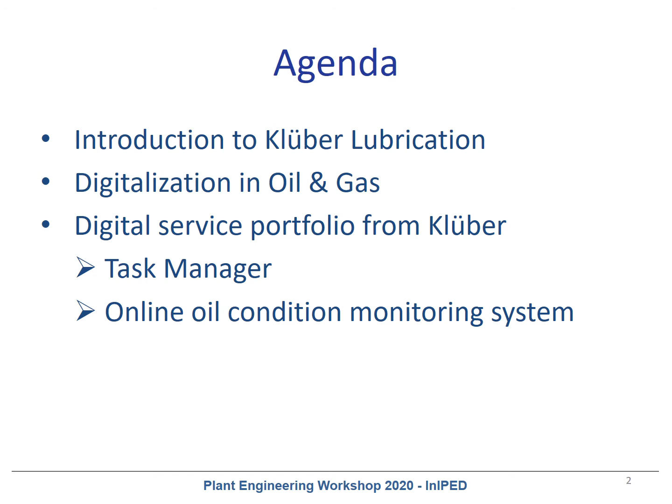I would like to start with a short introduction to Klüber before moving on to the topics of digitalization.

Founded in 1929 by Theodor Klüber, Klüber Lubrication is one of the world's leading manufacturers of specialty lubricants, offering high-end tribological solutions to virtually all industries and markets worldwide. Most products are developed and made to specific customer requirements. During its existence for over 80 years, Klüber Lubrication has provided high-quality lubricants, thorough consultation, and extensive services.

This has earned it an excellent reputation in the market. Klüber holds all common industrial certifications and operates a test field hardly rivaled in the lubricant industry. Klüber offers over 2,000 products, including oils, greases, pastes, coatings, as well as lubricant consulting and wide-ranging services. More than 2,000 employees located in 31 countries ensure our specialists are just a call away in case you need them. With 150 employees in our R&D, we are constantly developing innovative products and solutions tailored for our customers. Our strong tribological expertise guarantees a solution to any lubrication issue in the field.

You might wonder why a strong player in the lubrication field would suddenly be interested in providing digital services. With IoT and artificial intelligence becoming trending technologies for large manufacturing and industrial sectors, in order to meet the growing needs, the lubricant industry was no exception.

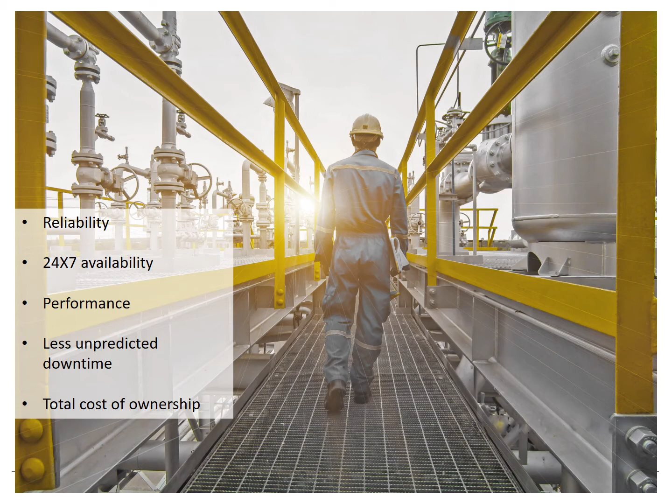Unplanned downtime continues to plague the oil and gas industry. The offshore sector in particular has been saddled with unnecessarily high costs and exposed to unnecessary risks as a result. Offshore oil and gas organizations experience on average $49 million annually in financial impacts due to unplanned downtime. For the worst performers, the negative financial impact can be upwards of $88 million.

As per a study conducted by Kimberlite, operators using a predictive data-based approach experience 36% less unplanned downtime than those with a reactive approach. This can result in, on average, $17 million dropping to the bottom line annually.

When looking at repair costs, 71% of expenses incurred on a typical offshore oil and gas field worldwide are resulting from unplanned downtime. Fewer than 24% of operators describe their maintenance approach as a predictive one based on data and analytics. The rest either took a reactive or time-based approach.

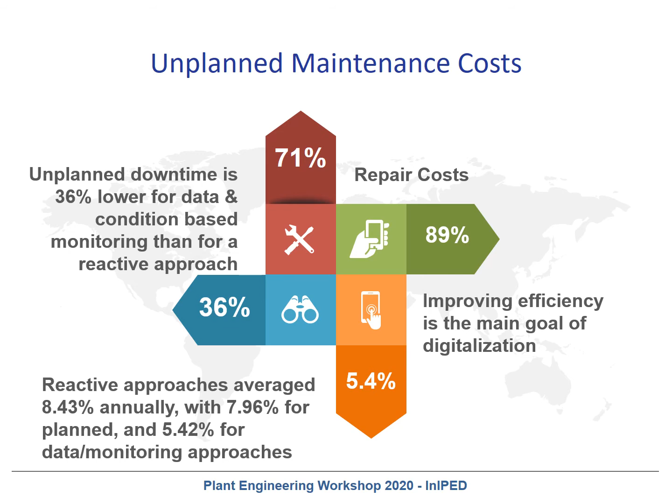In terms of the unplanned downtime associated with each approach, the reactive one averaged at 8.43% annually, with 7.96% for planned and 5.42% for data and monitoring approaches.

Updating maintenance practices to more predictive efforts driven by digital technologies and data-based optimization can enable offshore production facilities to reduce their unplanned downtime and drive better operational efficiency, which is exactly the goal of digital services offered by Klüber.

You may have the right lubricant for your application, one that is superior and meets industry and equipment standards. But does that ensure 24/7 availability of your equipment? What happens if somebody forgets to do the periodic lubricant analysis? What if somebody accidentally adds a wrong lubricant?

Poor lubrication is one of the topmost reasons for premature failure of industrial equipment. Lube tasks are not only routine in daily business, but rather critical to get the right lubricant in the right place at the right time using the right method of lubrication. It should be noted that lubrication tasks need a professional to ensure that the lube point is not over or under lubricated, or a lube point is not missed at all.

Our task management tools, which I would explain in detail in the next few slides, support you in doing exactly that. When it comes to performance analysis, having all your data in one place is critical to monitoring the health of your equipment. Klüber Monitor provides you the visibility and access to all your lube condition analysis reports and energy measurements, allowing us to provide you high-quality recommendations based on trend analysis.

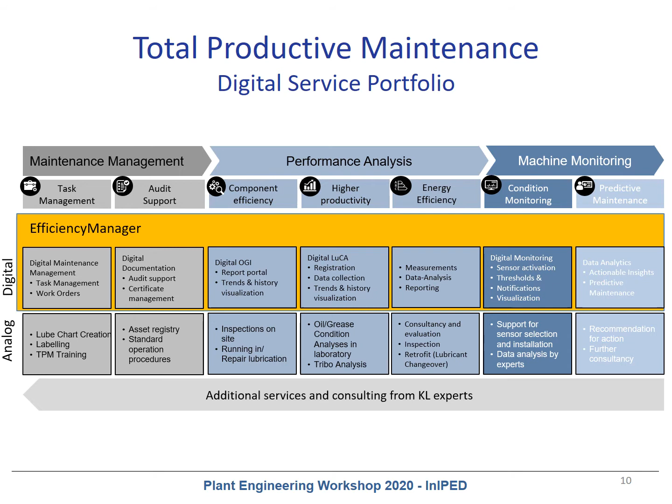What has been newly added to the service portfolio is the online condition monitoring for gear oils, in an attempt to move towards a more predictive maintenance of equipment approach.

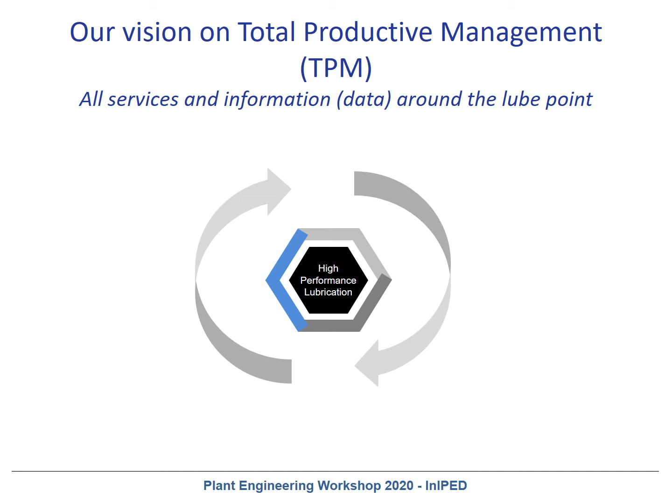Klüber's vision is to offer a system for total productive management, or TPM as we all know it. All the services and data are centered around the lube point. The maintenance, management, and performance analysis modules provide you with information about the lube point to ensure a preventive maintenance approach. Preventive maintenance costs half as much as corrective maintenance because it involves fewer parts and is typically performed on a schedule during normal business.

However, preventive maintenance costs 5 times as much as predictive maintenance, and about 60% of preventive maintenance is unnecessary. The machine monitoring module aims to provide you with the right consultation in order to move towards a more predictive maintenance approach. Predictive or condition-based maintenance is the least expensive form of maintenance in a well-thought-out lubrication program, because predictive maintenance is performed only at the time the equipment actually needs it.

To be done properly, this involves continually monitoring the health of the equipment, which is now more and more feasible since we are able to thoroughly monitor just about any lubrication point in your system. Putting the most focus on predictive maintenance will save more money long term and will provide the greatest improvement in total cost of ownership.

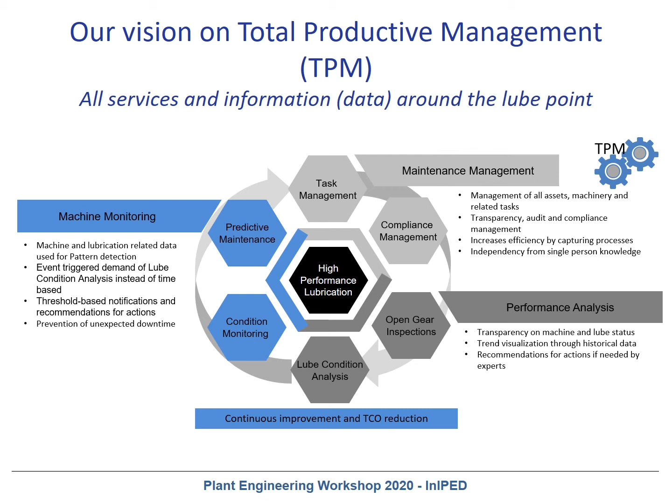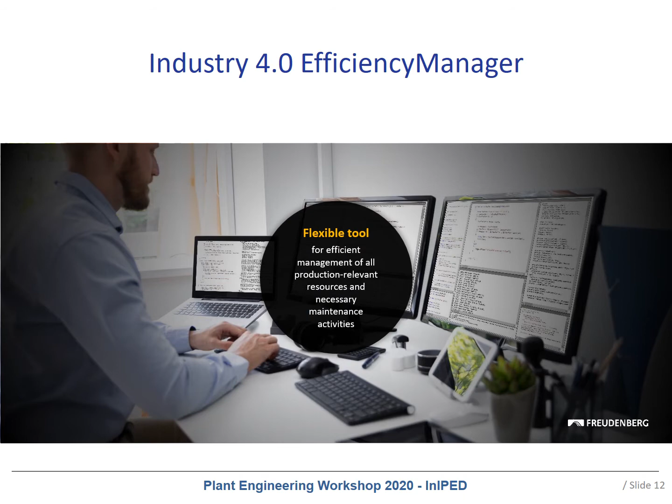The Efficiency Manager, or the user interface, is a flexible tool for the efficient administration of all production-relevant resources and required maintenance tasks in a modern way using the latest technology. Assets have to be initially entered, and maintenance tasks can be planned, overviewed, and reported back. Reports help to overlook the history and support audit activities.

Running at the back end are the different modules offered by Klüber, which can be individually purchased by the customers as per their needs.

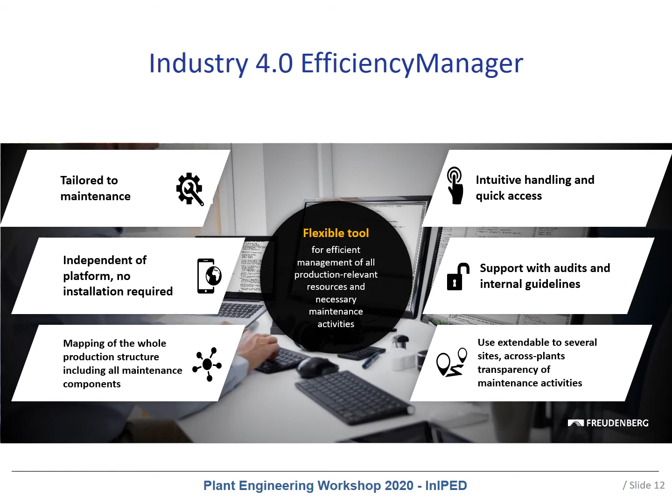The Efficiency Manager provides cross-plant transparency on status of machinery and tasks. The application provides an effective user interface, allowing visualization of the tasks, access to historical reports, and measurement of efficiency of their equipment, providing an optimum user experience.

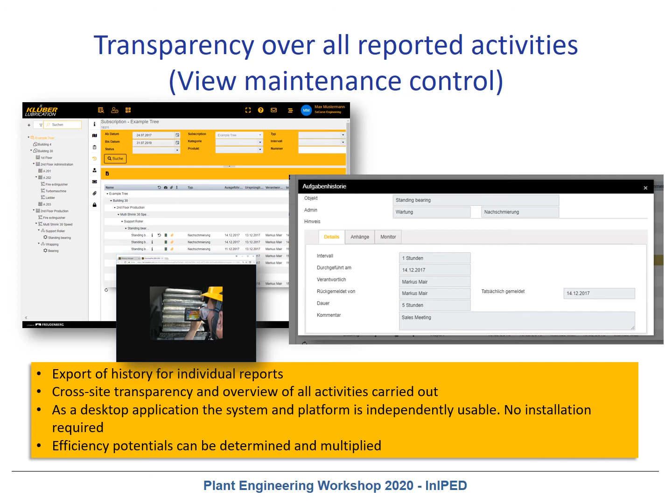One of the services offered by Klüber is the task or asset management tool, and let's look at that in a little bit more detail.

The task management tool, or Klüber Maintain as we call it, allows you to register your assets, label them, and add tasks to ensure that the lube point is never forgotten.

Improper maintenance work accounts for 17% of failures in industrial equipment. You need to know who is doing your maintenance work, what their qualifications are, what training programs have they completed, and what safety ratings and policies they have in place to ensure that they are well qualified to work on your critical infrastructure.

The goal of lubrication task management should be to ensure that all equipment gets and maintains the right level of lubrication in order to avoid equipment failure and therefore high maintenance costs. Lubrication task management is mainly the development and implementation of a lubrication program.

The task manager allows you to display your machinery in a tree structure, providing you with all the necessary details for effective maintenance of the lube point. The analog version of it is to create a lube chart in order to make sure all machines and equipment receive proper lubrication. An up-to-date plant lubrication chart is absolutely necessary.

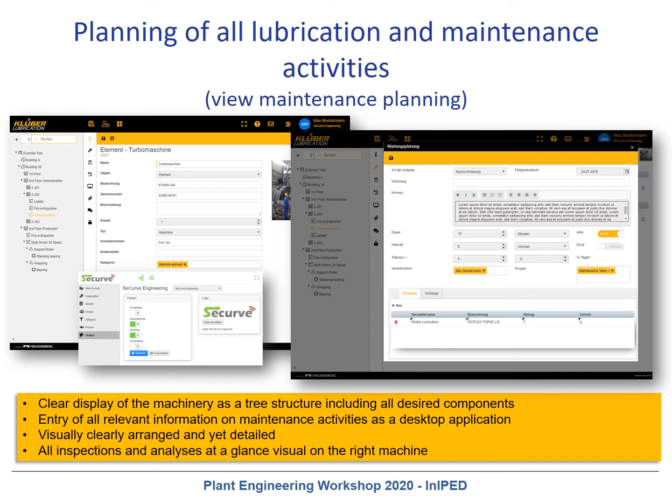By creating the chart in a customer's plant, Klüber gains insight into the used lubricants and gets the opportunity to recommend Klüber lubricants for selected applications. Its generation is also an opportunity to look for better ways to lubricate, find ideal maintenance intervals or application methods.

The digital version can be created in the Efficiency Manager. For example, a maintenance manager might have thousands of lube points under his responsibility. Every lube point might have a different schedule, and looking at an Excel file to know the schedule, what lubricant to use, and how much to use might be quite cumbersome. The Efficiency Manager gives you a clear overview of tasks to be performed, along with lube point details, lubricant, and quantities involved. It can also be accessed by different levels in the organization, giving a holistic view to the plant maintenance manager.

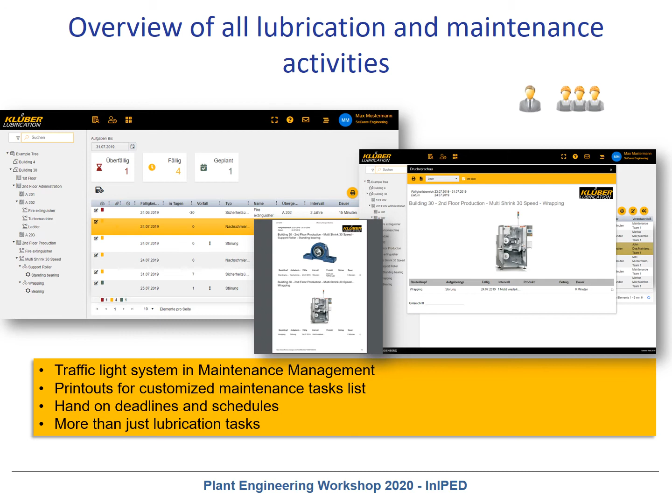Efficiency Manager provides a complete map of all lube points, along with clear and known responsibility for every lube point. What has to be done? Who would be doing the task? What are the intervals of lubrication? How to do it? On which machine? What is the position? Everything can be clearly visualized in the Efficiency Manager app.

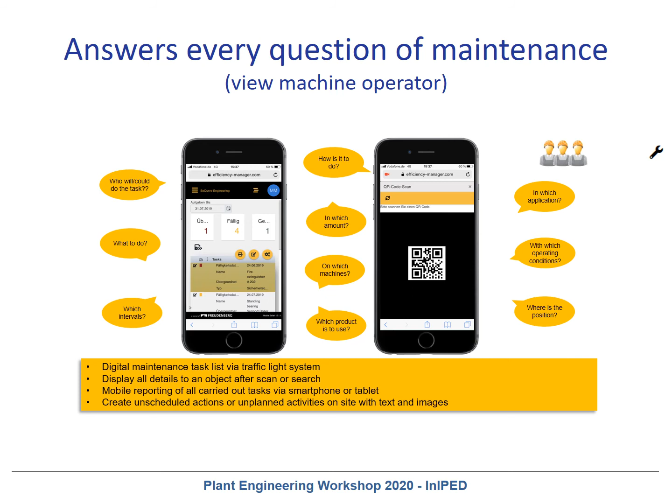It manages lube tasks automatically, eliminating human errors of missing or incorrect lubrication. A traffic light system gives you a visual status of the weekly task to be performed, making life extremely easy for you.

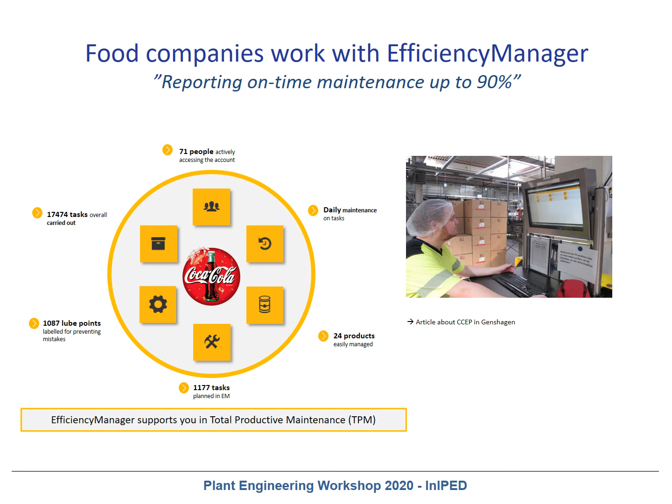We have implemented various modules of the Efficiency Manager with over 900 customers. Coca-Cola, which uses our Efficiency Manager to maintain over 1,000 lube points at their European facility, is one of our biggest users. Over 17,000 tasks have been created and completed via the Efficiency Manager, and they continue to remain a satisfied customer till date.

As mentioned earlier, we need to move towards a predictive maintenance approach if we are looking at reduction in losses, unplanned shutdowns, and reducing the total cost of ownership. One of our most innovative solutions is to provide online or remote condition monitoring of gearboxes, especially for our offshore customers.

Klüber has historically provided customers with the analog version of oil condition analysis. I'm sure all of you also perform periodic oil analysis to evaluate the condition of the oil in your equipment. The oil condition can be influenced by various factors like particles, temperatures, water, or damage to the equipment. But what if you're unable to send the samples out in time? What if you do not get the results back in time? What if you're not able to order the product in time? Or what if you are informed that you don't need to change the oil at all, even if the OEM recommends you to do so?

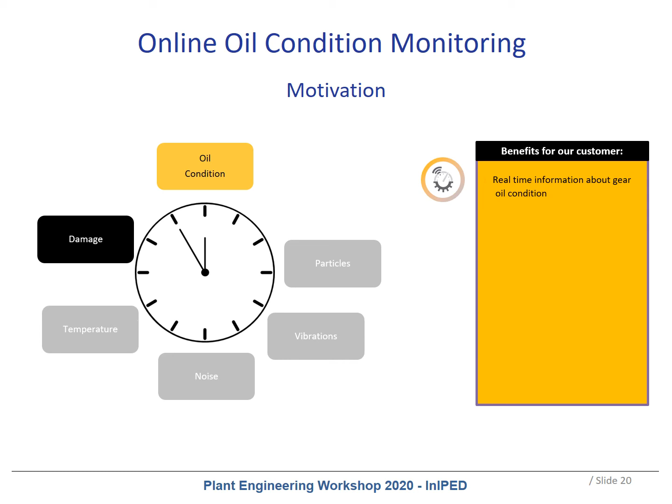Imagine the time and effort you would save if you did not need to collect oil samples, especially in offshore plants. Imagine the money you would save. Imagine getting real-time data on your mobile or tablet regarding the condition of your equipment. Imagine being able to visualize this whole data from all over the world for every piece of equipment you have. This would definitely mean higher operational reliability.

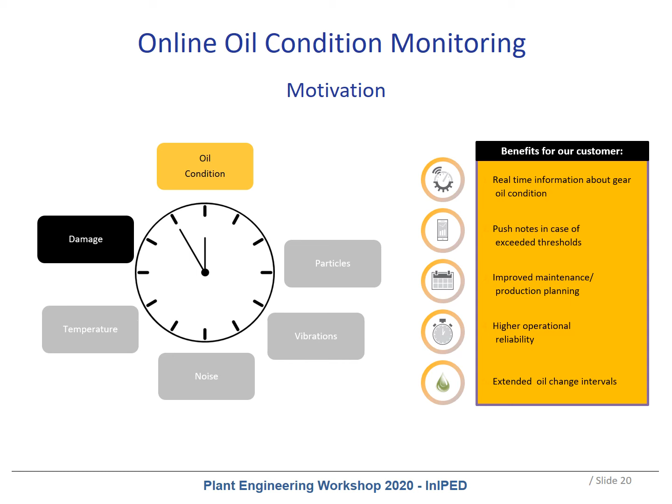All the machine manufacturers are making use of data analytics to predict failure, and Klüber is using exactly the same approach to predict the condition of the oil in your gearboxes.

We use sensors to detect the condition of the oil in your equipment. In order to identify the right sensor, we look at your historical analog oil condition analysis reports. Once the type of sensor is finalized, we send you the sensor as well as the gateway to capture and transmit the data to us. Our tribological experts analyze the data, comparing it with the analog data until we see a change in the oil properties. This is where Klüber brings in true value to our customers.

The sensors are readily available in the market, but they offer the same sensor for all oils. The tribology is best understood by us, and we are able to provide the right values to calibrate these sensors in an optimum way. Once the sensors are calibrated, you have a ready online oil condition monitoring system which will help you in predictive maintenance. All of this data can be visualized in the Efficiency Manager. The more data we capture, the more confident we will be in our assessment of oil quality.

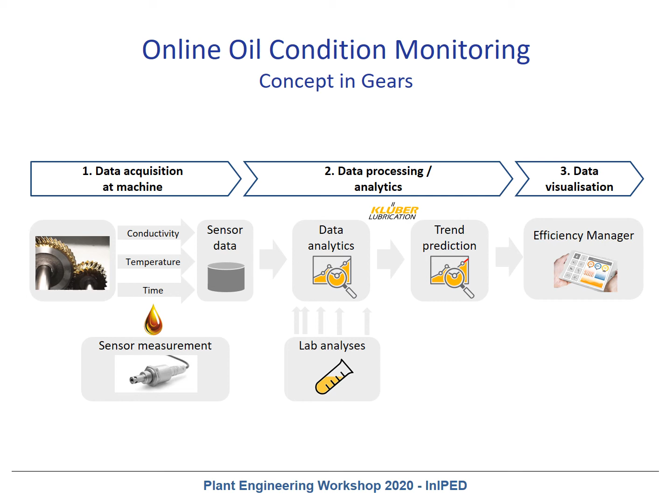We currently have 2 sensors mounted on 2 gearboxes, operating on fleets located in 2 different regions. The customer was running their pumps beyond the rated values and was experiencing unexpected gearbox failures. They jumped at our offer of installing sensors in order to avoid future unpredictable shutdowns.

The sensors installed measure oil quality and temperatures. The customer was previously using a mineral oil from our competitor. We have the historical data from the oil condition analysis performed with those oils, and currently they are using a PAO-based oil from Klüber. Our objective is not only to compare the digital as well as analog values of the oil quality and temperatures and analyze the effect on the remaining useful life of the oil, but also to improve efficiency of the equipment by shifting to a much better PAO product.

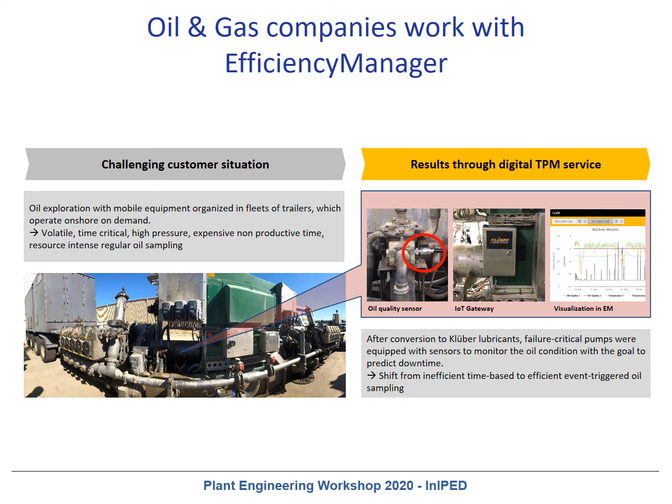We started the trial a few months ago. As on date, however, we have not seen any difference in the oil quality, and we concluded that a trial in the field could take ages to complete, as our PAOs are designed to provide a lifetime of 2 years or more. Hence, we created an in-house test bench which allows up to 7 sensors to be tested simultaneously.

The oil quality can be influenced by adding water, changing the temperature, or adding turbulence, or by adding particles. This means faster degradation of oils, which in turn means we would be able to calibrate sensors faster than what we did in the past, and we would be able to provide a complete package solution to the customers.

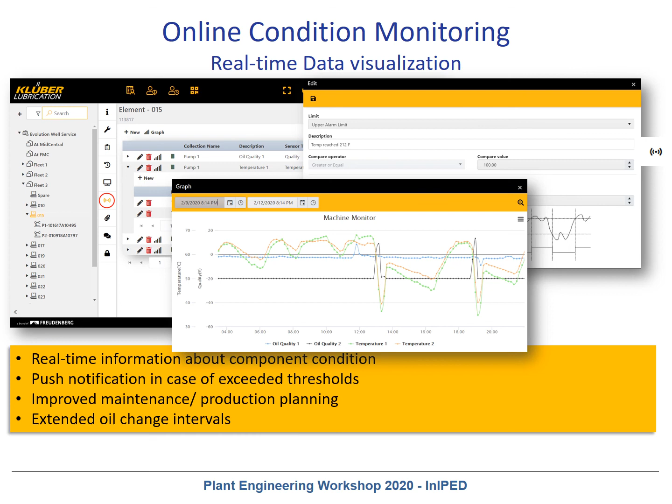What you see on screen is real-time information about the gear oils and its condition from the sensors in the field. Once calibrated, the user would receive a push notification in case the threshold value of the sensor is exceeded. With real-time information, we are hoping to provide our customers also with extended oil change intervals, improving reliability of the plant.

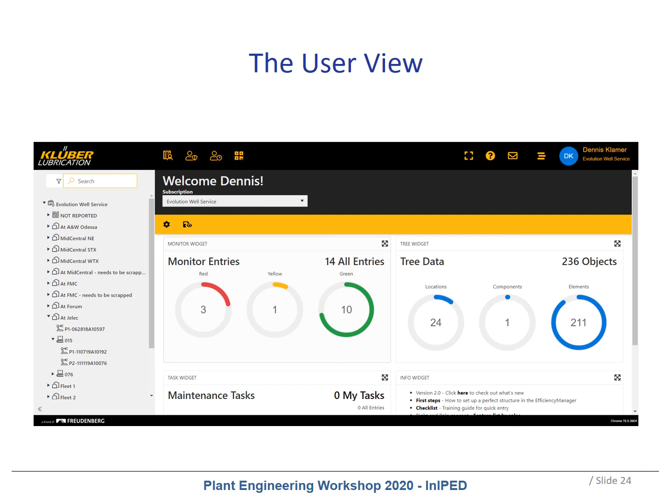We currently have 3 customers who are testing the sensors in the field, and we are monitoring the equipment health using analog as well as digital data. The analog tests are conducted as per the interest of the customer. It could be monthly or quarterly based on how the customer likes to do it.

The digital data, of course, is transmitted constantly, and our team here monitors it on a regular basis. The other two customers who are also testing are highly motivated as they have equipment which is not easily reachable or are providing it as a value addition to their customers.

In the package that we offer you get the sensor calibration as well as installation and the initial condition analysis. We are constantly looking for partners who have high motivation to be part of an innovative journey. If you're interested in reducing your downtime and offering this as a value to your customers, or you're looking to improve your reliability and move towards a predictive maintenance approach, you are at the right place.

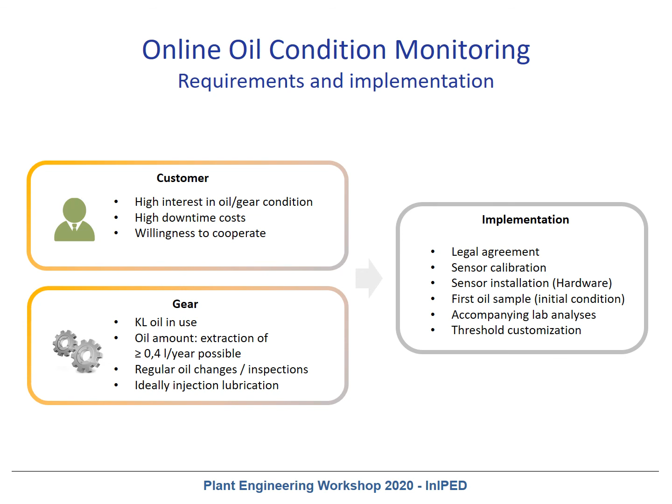Digitalization can be used to support operational reliability in several ways. Firstly, the use of sensors and analytics will boost energy efficiency, reduce fuel consumption, and in turn increase the oil change intervals, reduce unplanned shutdowns, and optimize productivity of existing assets. By lowering operational costs, the industry can increase profits.

The sensors and networks are designed to connect employees and tools, thereby cutting overheads and increasing margins. Remote monitoring will also lower the need for employees to conduct manual inspections, thereby reducing man-hours and further reducing operating expenditure. And lastly, automated controls can help reduce dangerous and hazardous inspections, safeguarding the personnel as well as the plant.

What do you hear when I say this? All I can hear is higher profitability, and who wouldn't like that?